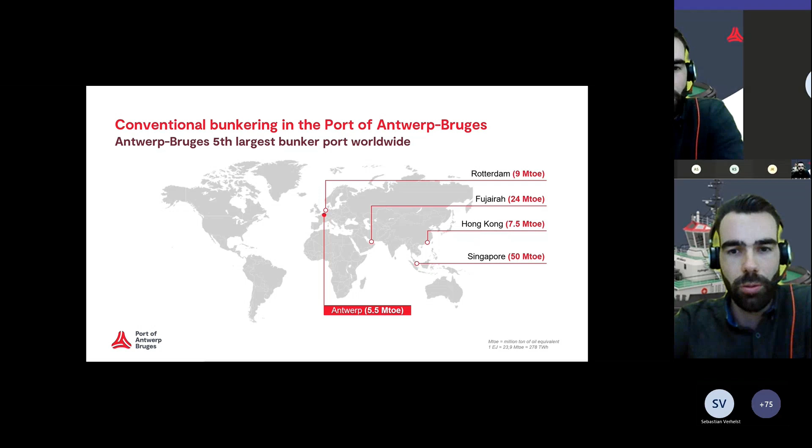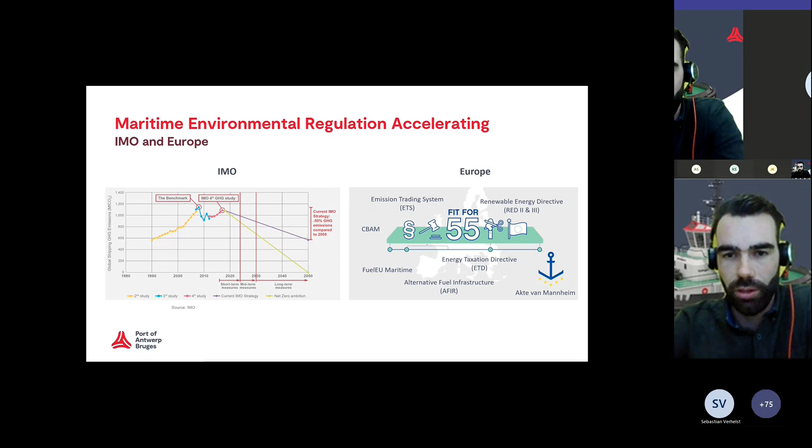If we look into the regulations - I think this was already briefly touched on - for seagoing vessels we look into IMO, which has set an ambition for 50% greenhouse gas emission reduction by 2050. They will probably even put a stronger target within the next couple of months. Europe is also preparing within their regulatory framework, and as Daisy already mentioned, there's the Akte van Mannheim, which also has targets on greenhouse gas emission reduction.

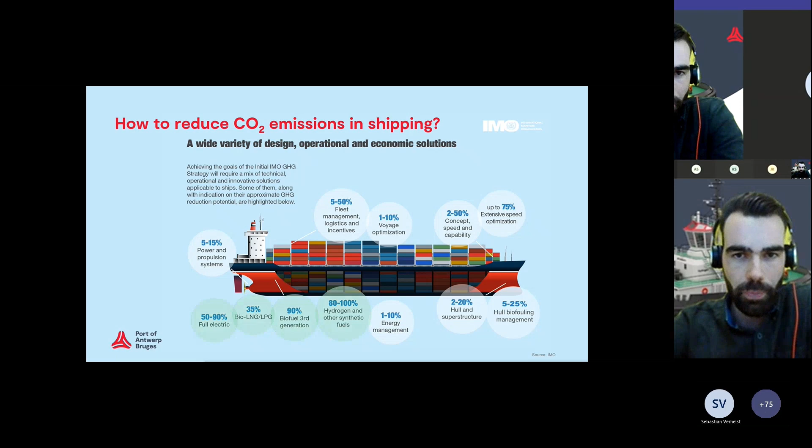So how can we reduce CO2 emissions in shipping? There are multiple options, but if we really want to make an impact, we will have to change the fuels being used in the shipping industry.

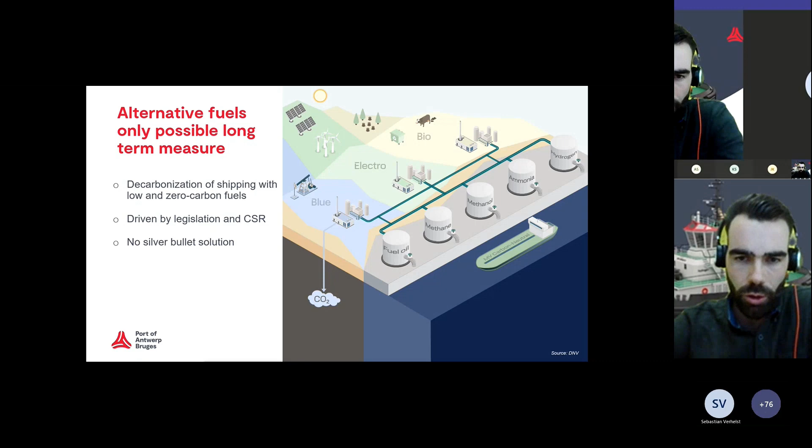Which fuels are possible? There are indeed a lot - we are looking into hydrogen, ammonia, methanol, fuel cell. There is no silver bullet solution. We think there will be multiple fuels for specific types of cargo or movements, distances, operational challenges, and so on.

So when we talk with the shipping companies - these are the seagoing ships - we ask: what fuels are you considering to use? We know right now LNG and biofuels are already in place and being used. For new fuels we are looking into methanol quite early, but also ammonia, hydrogen, and batteries are viable options for the longer term future.

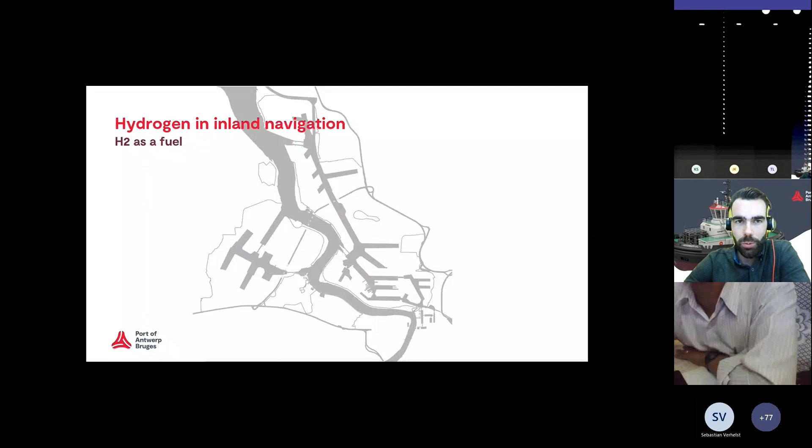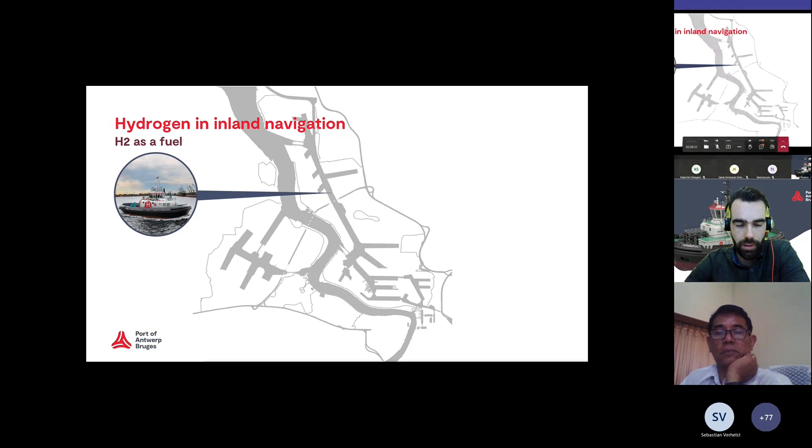So now I want to briefly touch on some initiatives and projects we are doing in the port together with our stakeholders. First, I'll start with hydrogen in inland navigation. We have our own hydrotug, which will come into operation within a couple of months. This ship is dual fuel powered, meaning it uses gaseous hydrogen in combination with diesel in a combustion engine. There's also already the Hydrocat, in operation for quite some years, used for passenger transportation across the Scheldt, which also uses a dual fuel engine.

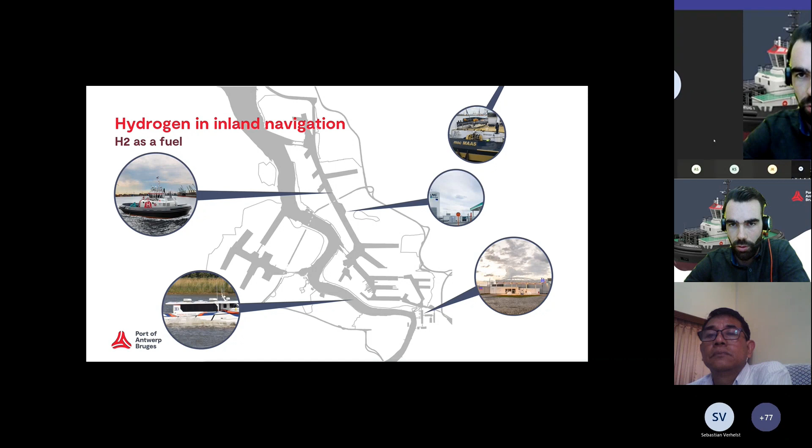We already have a multimodal hydrogen refueling station, from CMB Tech, so trucks but also barges and ships can bunker their hydrogen at this station. We also already have some facilities on LNG, which might be interesting for the provision of hydrogen as a fuel. And then there's the MS Maas project, which I will talk about more in the next couple of slides, also including the Rhine project.

In the Rhine project there's a spin-off, let's say, the Condor project, which is really aiming at the development of these containers, where standardization is quite a big issue today. There is none today, and we really want to build these containers and standardize them to be used all over Europe as well.

I think the important thing here is the value chain and the corridor approach. We will need more bunkering if you're using hydrogen, because there's less energy than diesel, for example - Sebastian already touched upon that. So there will be a need to have a corridor approach with multiple locations where you can quickly and safely switch hydrogen containers.

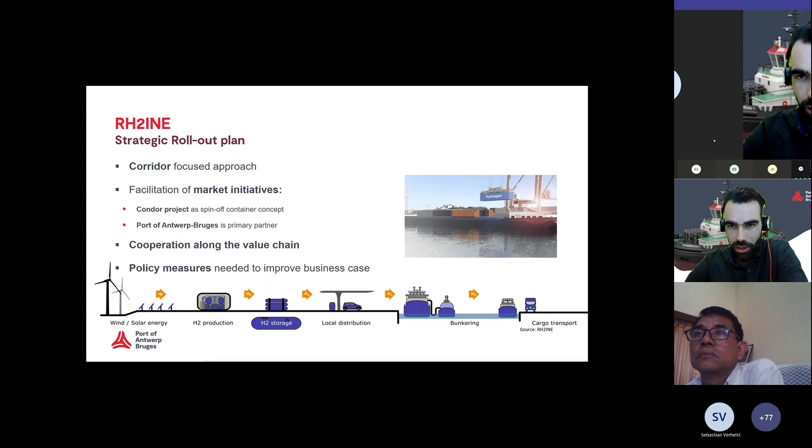One of the RH2INE pilot projects is the MS Maas, which will be bunkering its hydrogen in Antwerp. It's a containerized hydrogen solution, and the ship will use a fuel cell and electric propulsion. The hydrogen is contained at 350 bars, meaning there can be around 500 kilograms of hydrogen in one container. The ship will swap one or two full or empty containers in Antwerp and will sail between Rotterdam and Meerhout, making a pit stop in Antwerp to get the hydrogen.

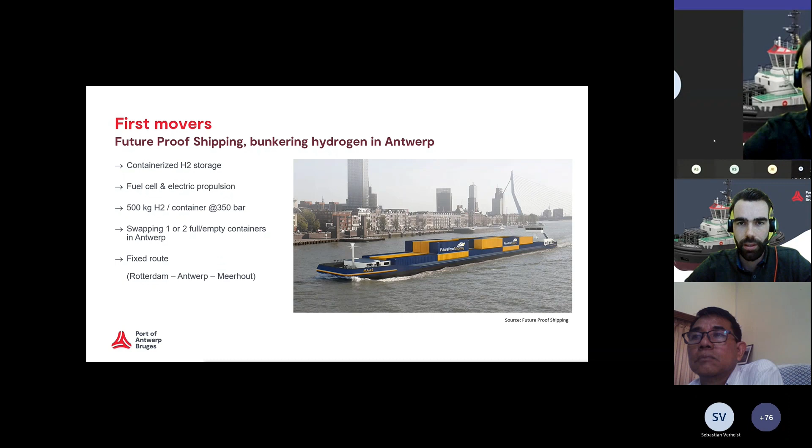We are also involved in an infrastructural project on a battery loading station. It will provide power for containerized batteries, which can also be used for propulsion of ships. It's part of the Pioneers project. ZES is right now really pioneering in this, but we are also looking into other operators and providers of these types of batteries. The battery loading station will actually be open access to all, not exclusively to ZES.

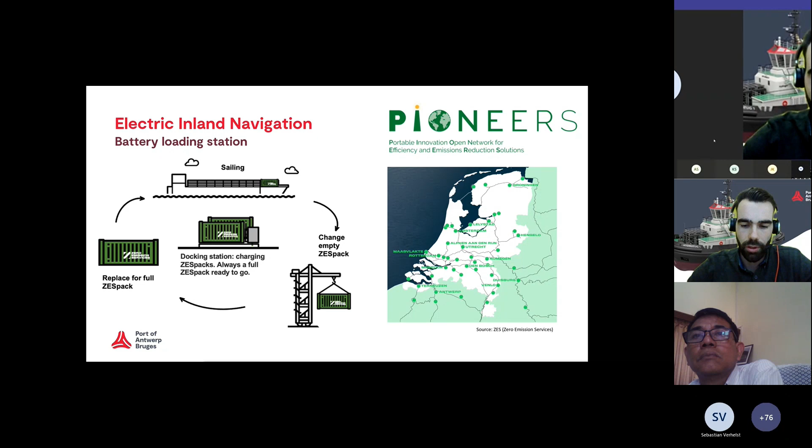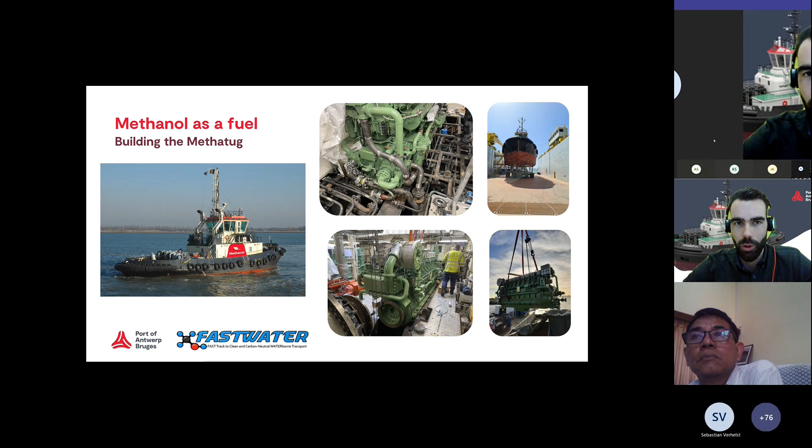Then if we're talking about methanol, it's something Sebastian already touched upon. We are building right now the Methatug, which will come into operation within a month or two. On the right side you can see the engines being built in, and on the left side a rendering of our tugboat. It's part of the FASTWATER project.

One last initiative: together with the Flemish Waterway, the Flemish Department for Mobility, North Sea Port as well as Port of Antwerp-Bruges, and the Flemish Inland Navigation Knowledge Center, we are trying to bring all stakeholders in the inland navigation sector together to work on technology, policy, financial solutions, and implementation of solutions for greening the Flemish inland shipping sector.

We want to create a starting point for the greening of Flemish inland navigation, and the outcomes can serve as a reference framework for future initiatives and guidance for policies. But most importantly, it will create a movement that makes efforts more visible. So if you're active in the navigation sector in Flanders and interested in greening your operations, or working as a technology provider or within policy, you are certainly welcome to join our Green Deal.

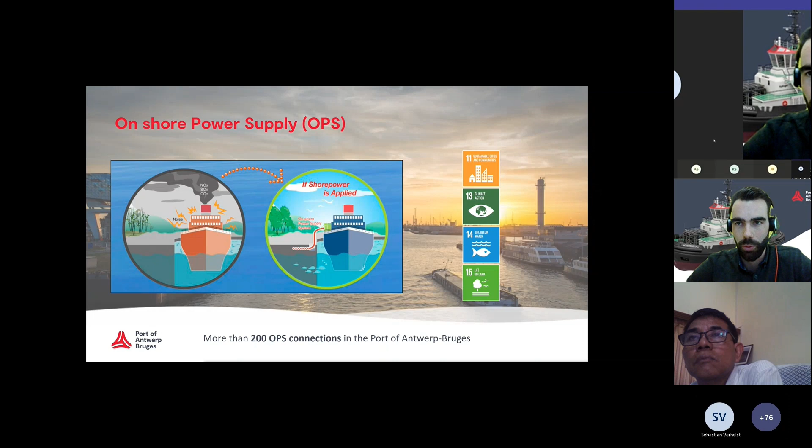If I still have some time, I'll be very brief. We also have our own strategy to make the usage and transportation of fuels in our port viable. Therefore, we are looking into different roles we can play: a regulator role, operator role, a landlord role, and a community building role.

As an operator, we are looking into more sustainable fleets and more sustainable vessels from the Port Authority itself. As I already touched upon, we have the Methatug and the Hydrotug - really pioneering projects using alternative fuels. We also have hybrid patrol vessels, which work mostly on a battery, with an autonomy of around 4 to 5 hours depending on the operations being done, to sail on a battery.

And then we also have the reverse stern drive energy efficient tugs, which use an interesting technology to get 50% more efficient operations.

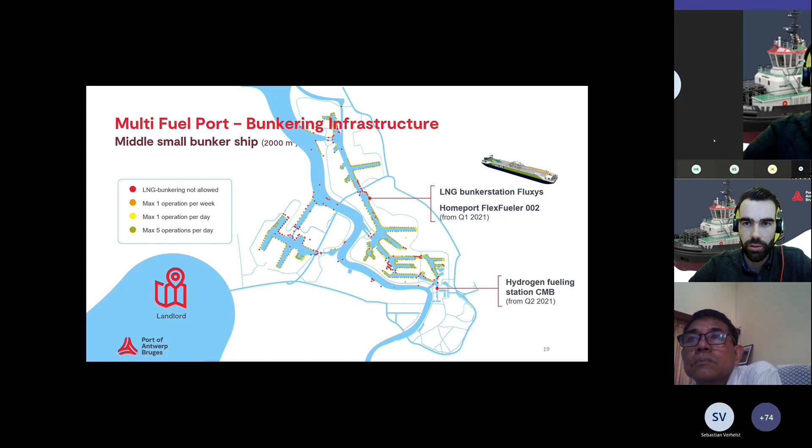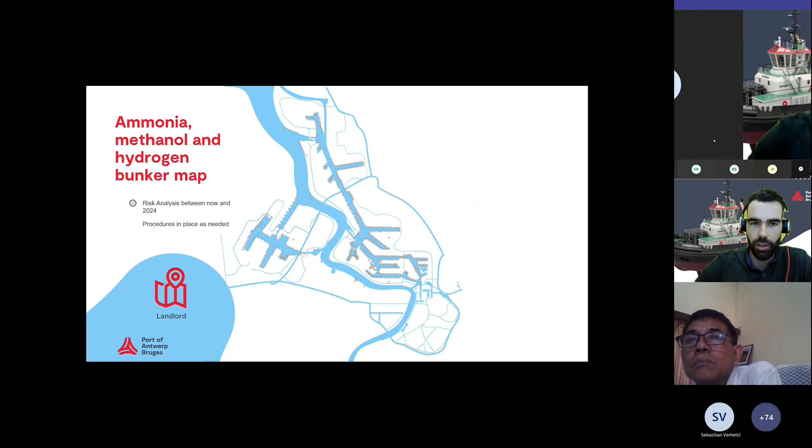When looking into our landlord role, we want to provide a clear framework where all shipping companies and ships can bunker, creating a safe environment. We will be doing a study on possible bunker locations in our port and will make a bunker map, as we already have one for LNG. For methanol, hydrogen, and ammonia we will make the same types of bunker maps so we can have safe operations in our port. When it comes to safe operations, we are also working on a framework for the bunker operations.

We are putting up a licensing system for the bunker operators for each type of fuel. We will of course control if the bunker map is being followed. And we are already making compulsory use of a bunker checklist to provide to bunker operators to really check if everything is checked out before starting the bunker operations.

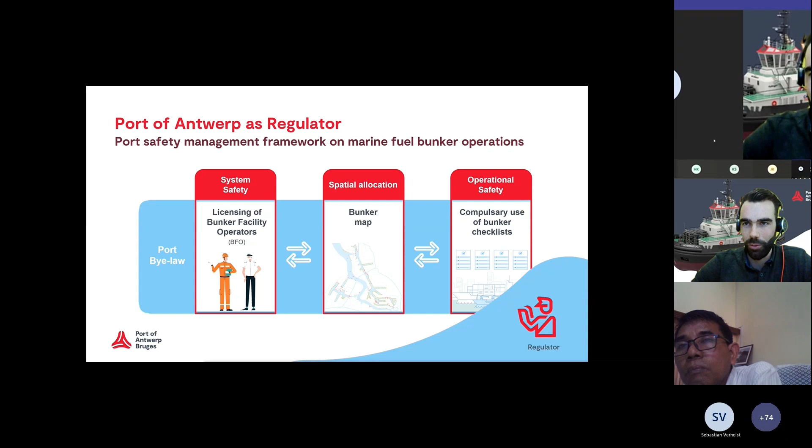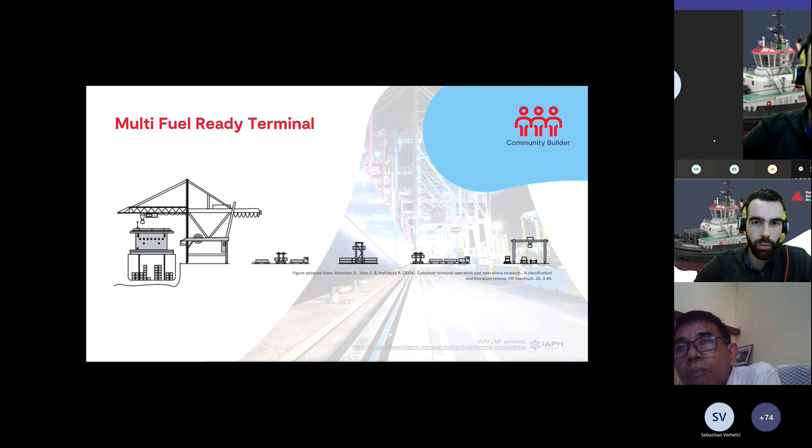We are not doing this alone. It's an integrated approach where we are jointly licensing bunker facility operators to make it as efficient as possible and to make sure we have the same rules as other ports. And then last, we have the community builder role, where we are also talking with the terminals in the vicinity of these new ships on new fuels, where there are new risks involved. We really want to prepare everyone, not only on the shipping vessel but also on the terminal side, to safely use these new fuels which come at a higher risk.